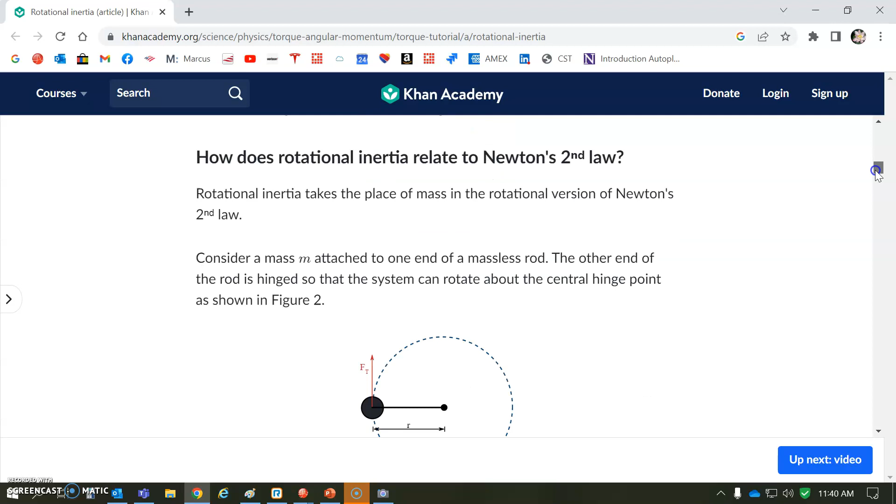And so to compensate for the inertia, you have to understand what inertia is. So it's the mass at the end of a radius, the square of the radius. And so I is inertia, or J is inertia for motors or loads, or M is inertia for mathematicians. And so to accelerate this inertia, you have to apply a force orthogonal to it. Blah, blah, blah, Khan Academy.

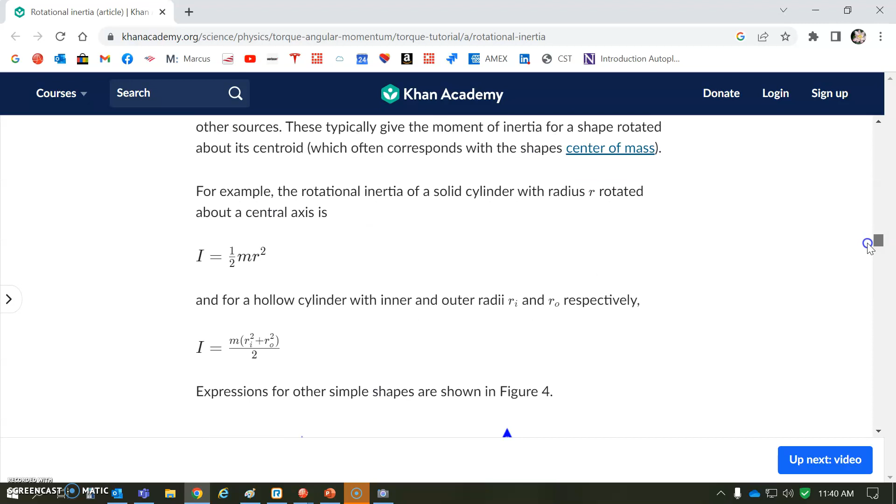So the shape is very important to determine the inertia of it. So if you had something that was long, it would be unwieldy because it has a high inertia. Okay, so your length gets squared. Oh boy, it feels like a lot of inertia because it has such a long length. But if you turn it on its side and twist it, it becomes a rod, and it's just the radius squared. So this is a solid one, so this is 1/2 the mass, the radius squared. So you got to figure out where the center of mass is and rotate it. Anyhow, that's the one thing we have to compensate for, to apply a current to accelerate the mass.

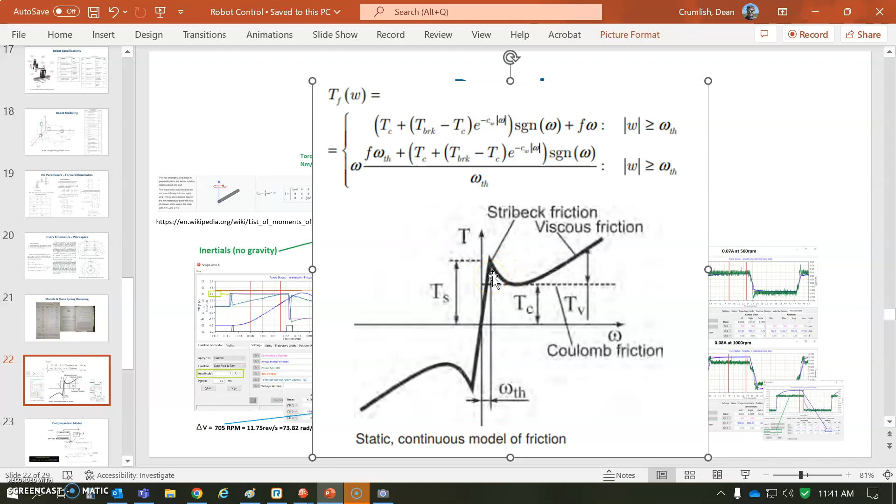When we're running at the constant velocity, we have to worry about the friction. So the viscous friction is after you get over the little hump of static friction. Stribeck talks about the lubricants and stuff for the bearings. This bearing is pretty smooth. There's not a big preload on it, so there's not a lot of static friction, so we get past that. And so this small amount of friction is called the Coulomb friction, and then it grows from there. It grows as your speed goes up based on your viscosity. So the friction increases as you go faster.

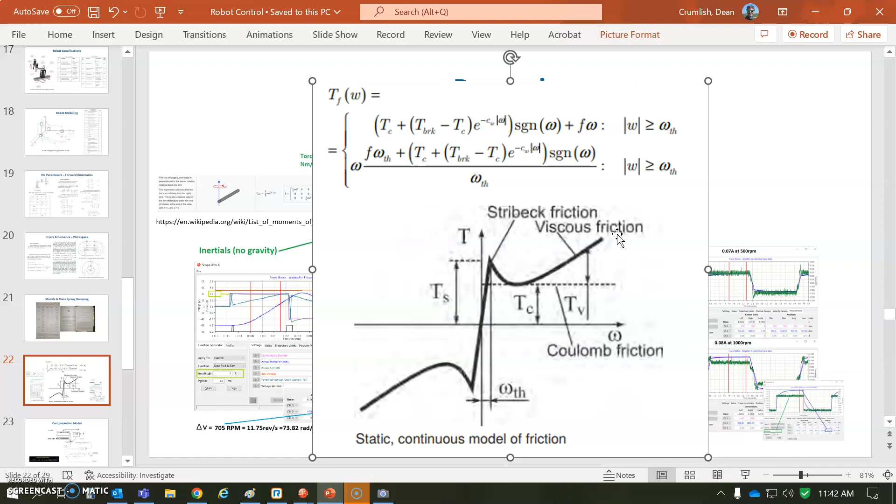So that's speed related. And of course, another thing in a dynamic model, besides the inertia and the viscous friction, might be gravity. Okay, so gravity would pull down on something. Mass times the gravity and the radius, the cosine of the angle. This is rotary, okay? So there's no gravitational effect. If it was turned on the side and you had a mass there that was not circular, then yeah, you'd probably feel the gravitational effects from the center of mass out the length of an arm.

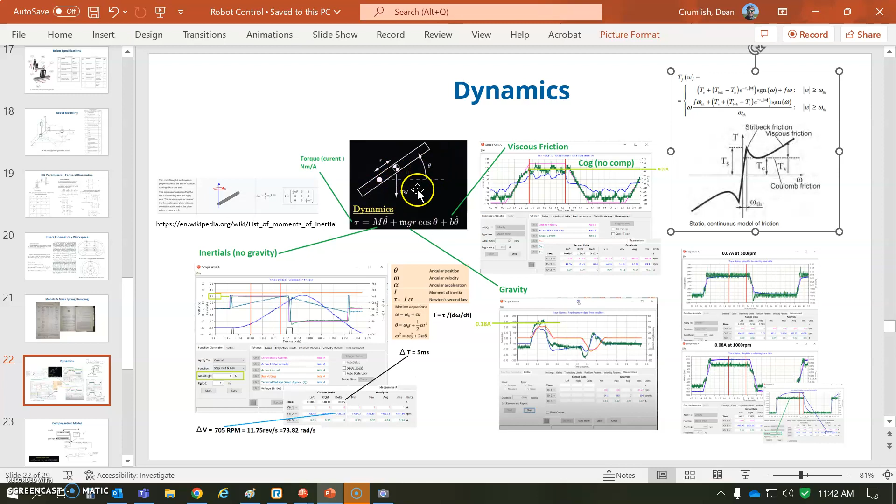So there's different dynamic model compensation, but the basic idea is, if you have something that's disturbing the system, like cogging, you can compensate for it by injecting a command into the current loop. For gravity, you counter the force of gravity with your own torque or current or force in the upward direction, that would be the cosine of the position, and then add to that some viscous friction based on your velocity. And then, of course, to the summing junction, you want to inject some torque based on your mass or inertia. This is the center of mass over a distance, so don't get confused by M. That's the J or the I for inertia, based on your acceleration.

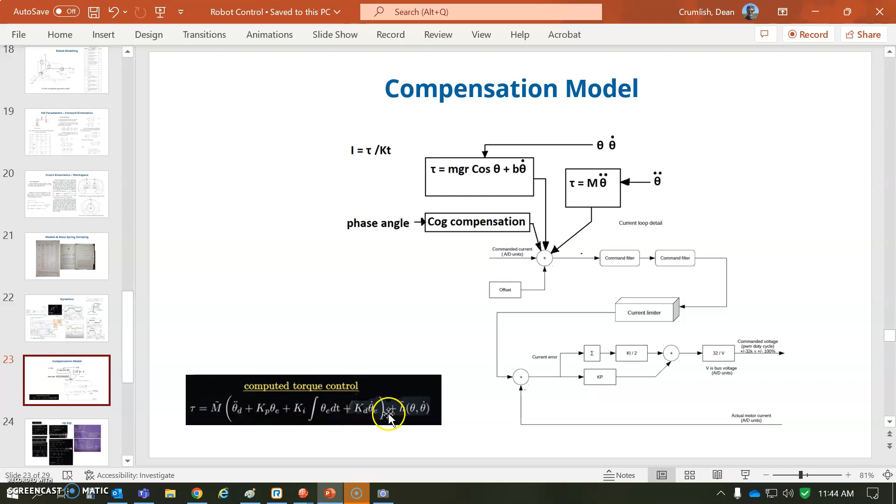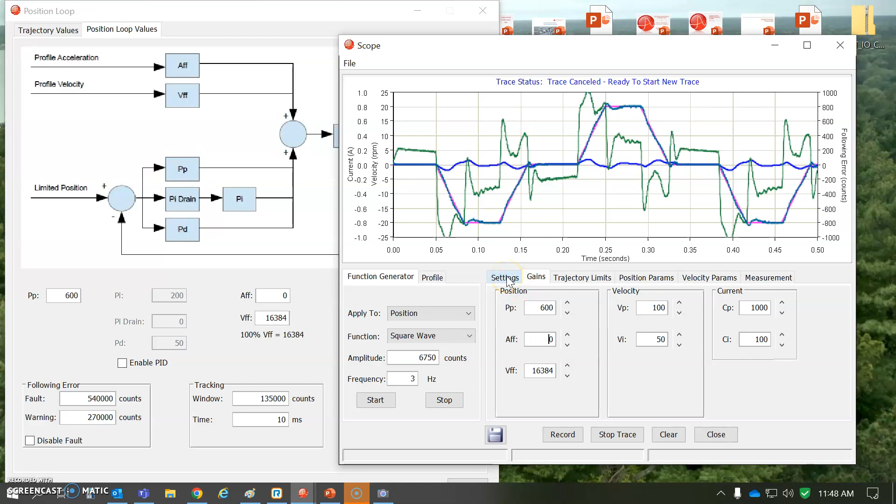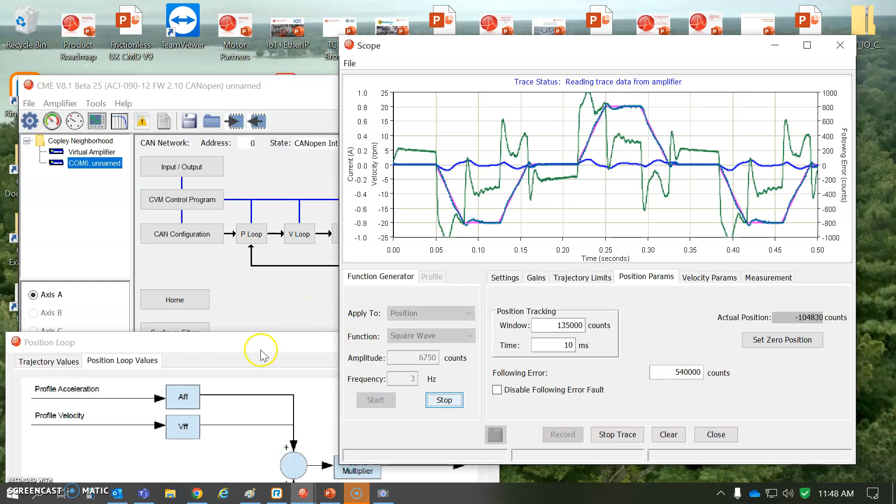Okay, so this would be some tuning based on using your nested loop. Might go for a little bit more proportional gain to be fair. I mean, as your inertia goes up, this PP's got to come down anyways, but you're going from 500 counts. I got it down to 400 counts. The tuning looks pretty good.

I mean, the velocity is following. There's a little lag, a little overshoot, but you know, without any integral, you're going to have steady state error. And no, there's no dynamic model compensation in this, and my steady state error is about 50 counts. And I crank up to 500 counts. I could stiffen up my velocity loop.

I'm trying really hard to get this normal, just plain old loop tuning with no compensation to approach the 100 counts. But this is looking pretty good. So very stiff loop. It's a little buzzy. Got to be careful of breaking into oscillations. But I cranked it up a bit. I guess that's the advantage of dynamic model.

There's some variations and you don't start buzzing all of a sudden, but the proportional is coming down, and let's give it a little bit of integral there. Should bring us into a steady state. So I'm really cranking up the pitch. You can't do this with a large inertia, so if there's a bigger mass than just the motor, that might not be so helpful. But, you know, 200 counts and steady state error, it gets down to 0.

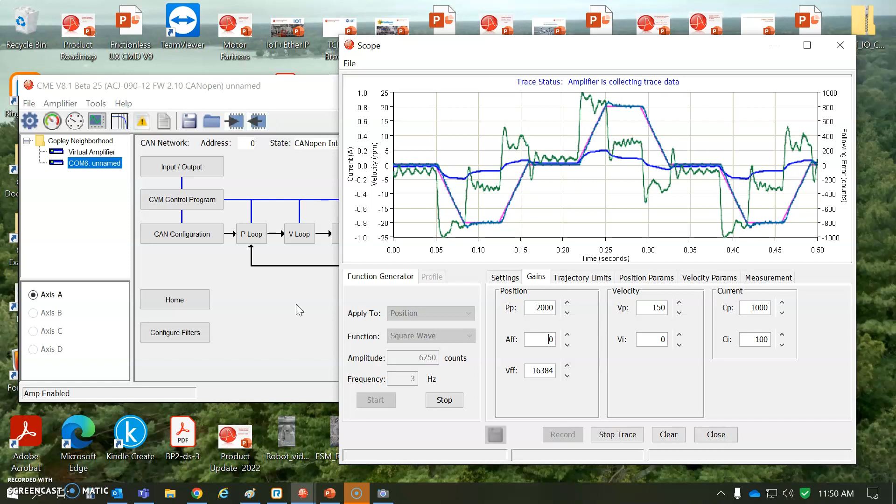So there you go, kind of a comparison and contrast between nested loops or just plain old PID and no feed forward terms injecting into the current loop for dynamic model compensation. Okay, thanks for watching.